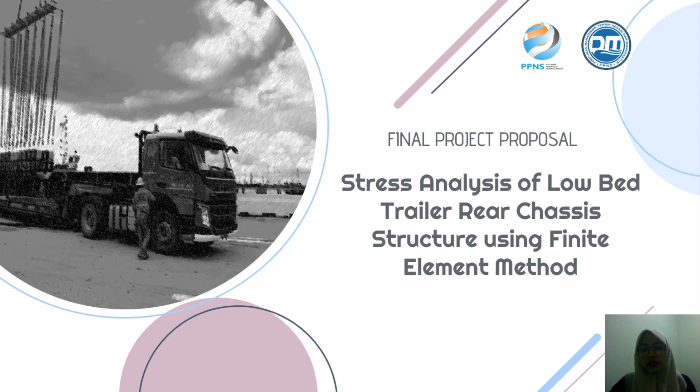In this occasion, there are 3 points of discussion. The first is introduction. Introduction is about research background, research problems, research objective, research significance, and delimitation of the research. The second is literature review. Literature review is about finite element method. And the third is methodology. Methodology is about flowchart and estimation of research time.

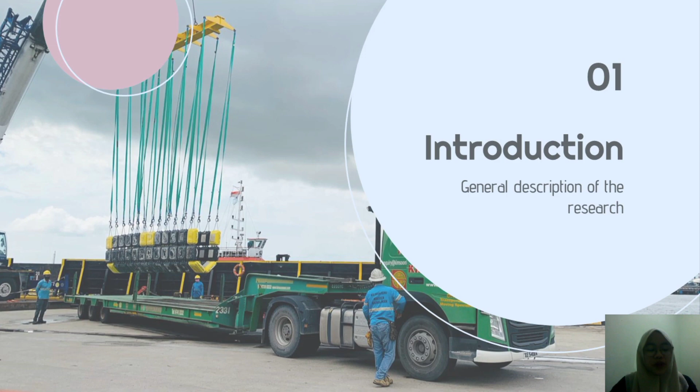The first point is introduction. In this point, we will discuss the general description of the research. The growth of the manufacturing industry is in line with the increase in logistic and distribution activities in the production and construction process, such as mining raw materials, building materials, and equipment, especially with heavy materials.

In the distribution process, heavy equipment is required to transport the material. Using direct equipment transportation can help increase efficiency and productivity in the process of transporting and distributing materials, and also can reduce the risk of work accidents. And for transporting and distributing heavy equipment, transportation like a lowbed trailer is also needed.

A lowbed trailer is a type of transportation used for distributing heavy loads such as construction equipment, machinery, and large buildings. Because the tonnage transported is very large, to produce a lowbed trailer with high quality, several factors must be considered: design, selection of the right material, an efficient production process, as well as structural analysis.

Structural analysis can help determine the strength and critical points that have the highest stress, as well as the stability of the structure required to withstand the large loads. The chassis structure of the lowbed trailer has an important role because it is the main structure that functions to support the weight of the truck and the large load.

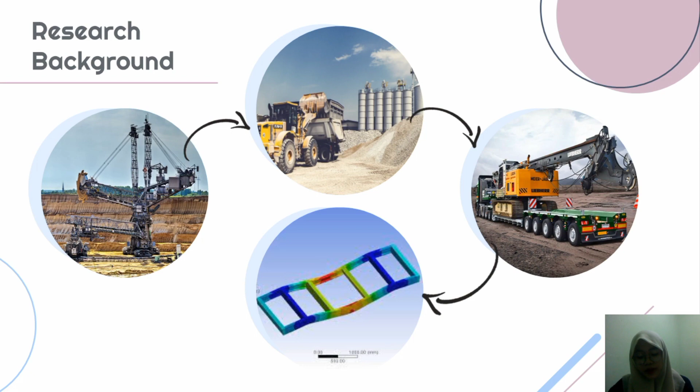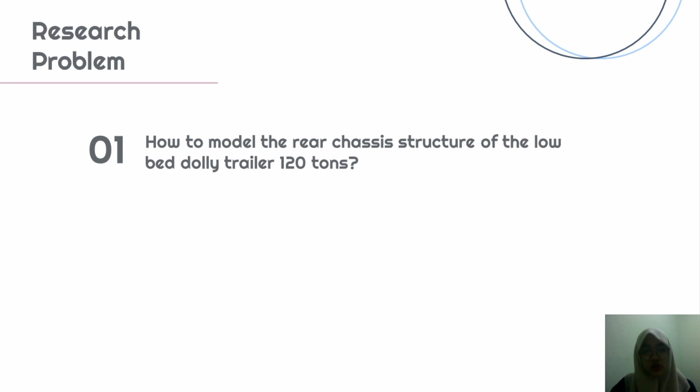So from this research, it is hoped that there will be design improvement, increased efficiency, and cost effectiveness, which can be applied to the next manufacturing production of lowbed trailers. Next is the research problem. First, how to model the rear chassis structure of the lowbed dolly trailer 120 tons. And second, how to analyze the rear chassis structure stress of the lowbed dolly trailer 120 tons.

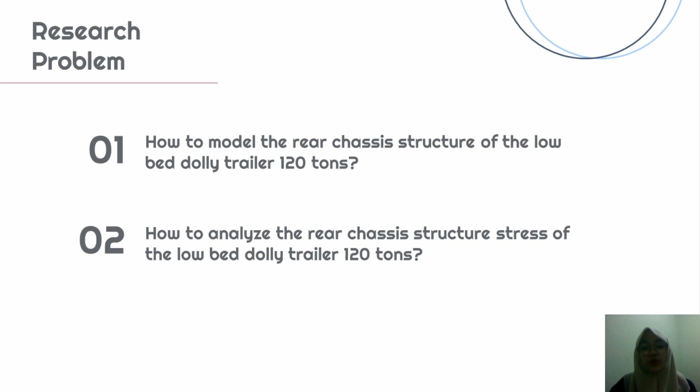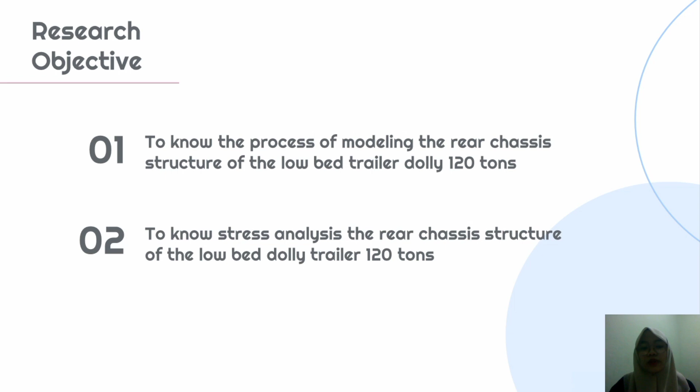Next is the research objective. First, to know the process of modeling the rear chassis structure of the lowbed dolly trailer 120 tons. And second, to know the stress analysis of the rear chassis structure of the lowbed dolly trailer 120 tons.

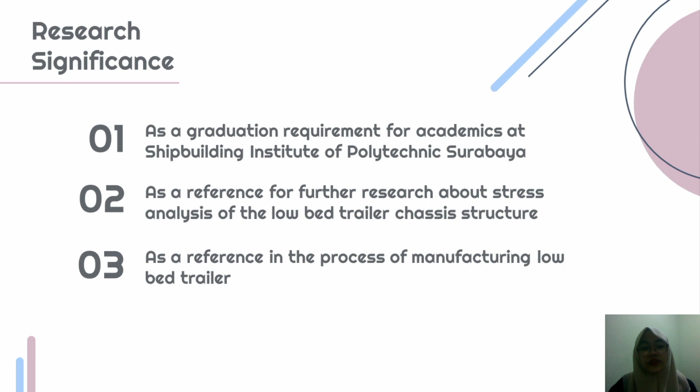Next is research significance. First, as a graduation requirement for academics at Shipbuilding Institute of Polytechnic Surabaya. Second, as a reference for further research about stress analysis of the lowbed trailer chassis structure. And third, as a reference in the process of manufacturing lowbed trailers.

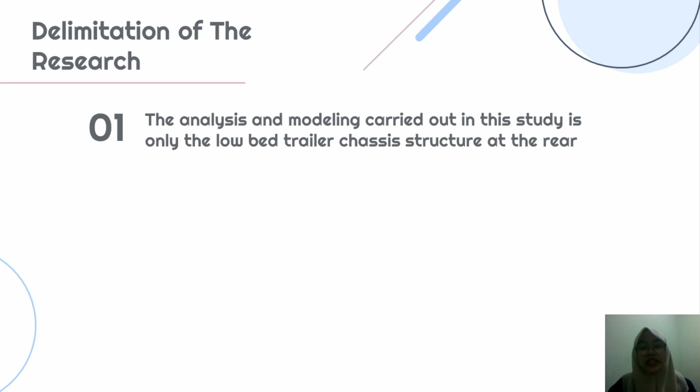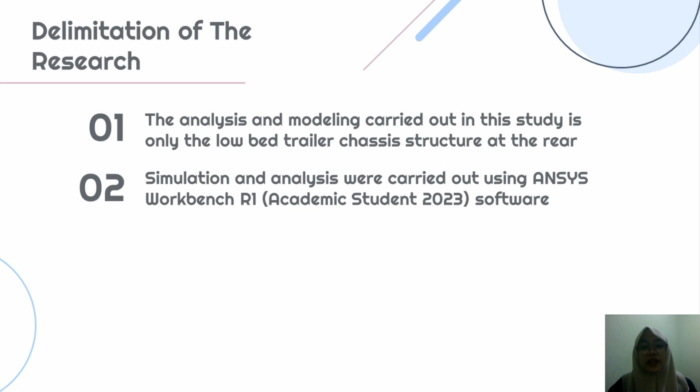Next is the delimitation of the research. First, the analysis and modeling carried out in the study is only the lowbed trailer chassis structure at the rear. Second, simulation and analysis were carried out using ANSYS Workbench R1 Academic Student 2023. The material used in the structure of the main beam of the lowbed trailer is ASTM A514 with a tensile strength of 780 Newton per millimeter square.

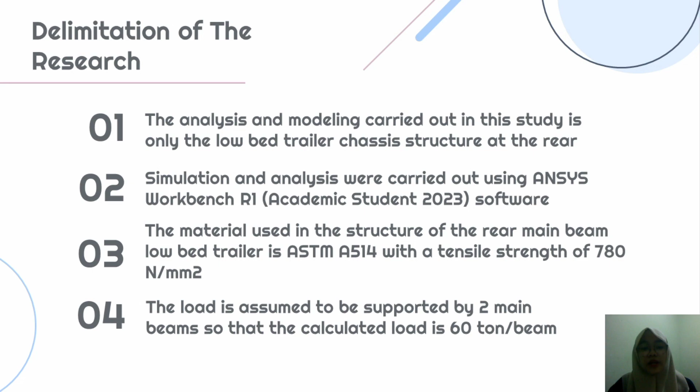And fourth, the load is assumed to be supported by two main beams so that the calculated load is 60 tons per beam.

And the next is about literature review. Literature review contains theory that will be used in the research. The first is about lowbed trailer. Lowbed trailer is a type of truck that is used to move heavy and large loads, such as heavy equipment, large industrial machines, vehicles or building materials. So this truck has a low and wide chassis structure that allows for easy loading and unloading.

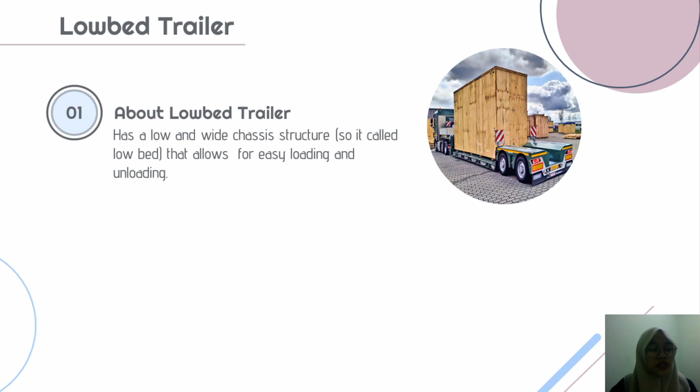The chassis structure is the basic structure of the lowbed trailer, which is made of a steel or iron frame and has the function to support the weight of the truck itself and the materials being loaded or transported.

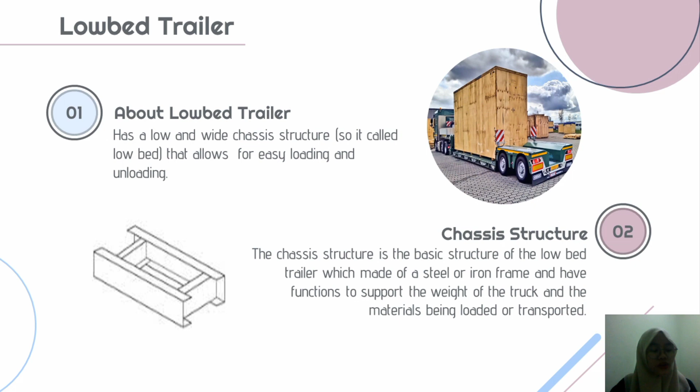And next is about finite element method. The finite element method is one of the numerical simulation methods used to estimate the response or behavior of a structure under certain conditions by dividing the component or structure into smaller parts, which is called discretization.

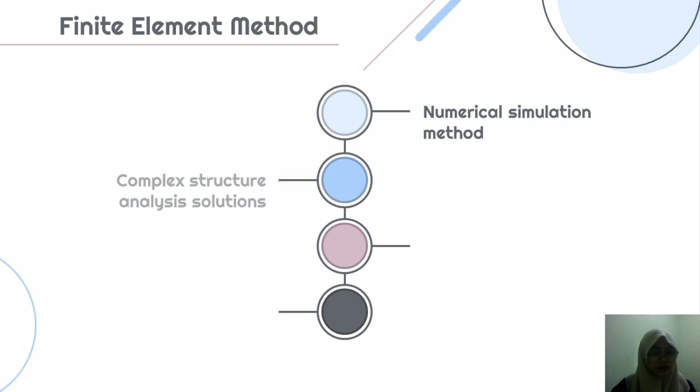And second, complex structures are difficult to solve with mathematical analysis because mathematical analysis requires a quantity or value that must be known at each point of a structure. So the finite element method can be used to help with this problem. Third, finite element can be applied in several structure analyses, like fluid flow, etc.

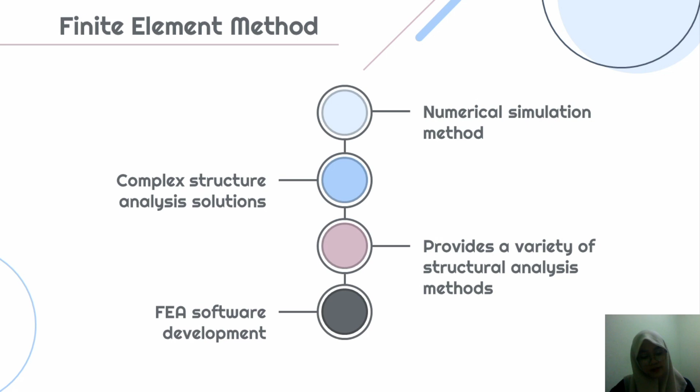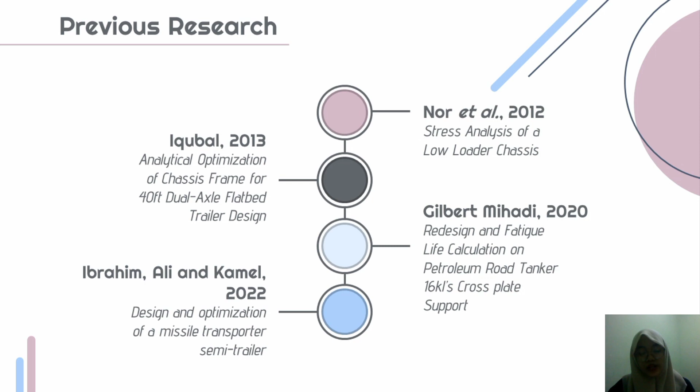And fourth, with the growth of technology, currently there is more finite element method software to help design components, so the calculation process is simpler and faster. And next is about previous research. There is some research literature used as reference for this final project. Some of this previous research used the topic of stress analysis of chassis structures using the finite element method, which is used as reference for further design improvement.

So, ANSYS is software to help in running simulation and technical analysis using the finite element method. The result from the ANSYS simulation will help to determine the minimum and maximum stress. There are several processes in running data in this software, such as pre-processing, a step to input data regarding the required material information. Second is analysis, a step to run the machine process. The third is post-processing, a step to check and review the result from the analysis simulation.

And the fourth is convergence, a step to do convergence tests. A convergence test is a way to determine the correct element size in finite element calculation so that the analysis can obtain a valid value.

The third is methodology. Methodology describes the flowchart of the research methodology. This is the flowchart from this project. It starts with problem identification about how important structure analysis is in the manufacturing industry. Next is determining the research problem and objective, then making the 3D modeling, then simulation with ANSYS software to determine the stress and fatigue life of the lowbed trailer chassis structure, and then analyzing the stress from the results of the ANSYS simulation.